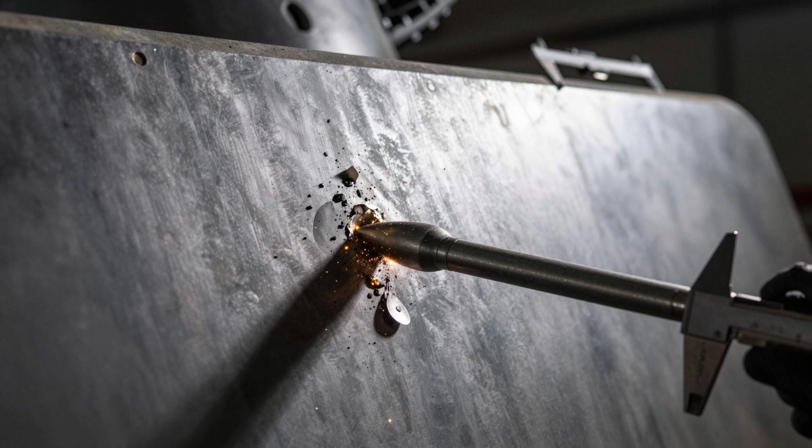Have you ever wondered how something the size of a finger can pierce armor as thick as a human body? Logically, it should just bounce off, but it doesn't, and it's not about size. It's what happens a millisecond before impact.

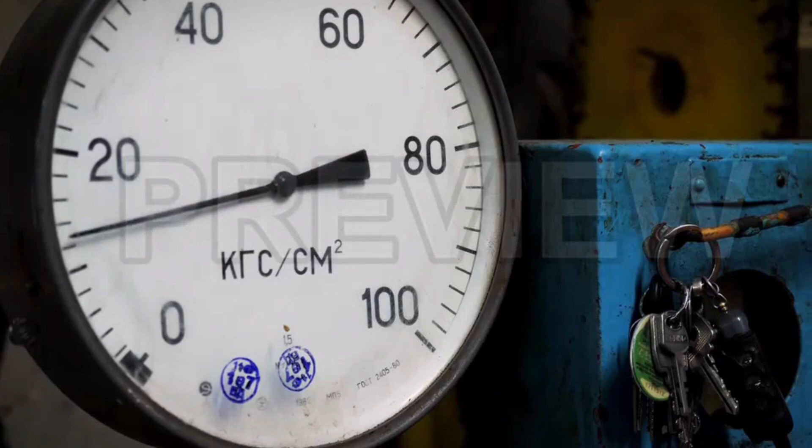The 2A82 tank gun on the T-14 Armata generates pressure inside the barrel of roughly 750 megapascals at the moment of firing. That pressure means nothing on its own, so consider this: atmospheric pressure at sea level is 1 unit. The pressure inside a deep-sea submersible at the bottom of the Mariana Trench exceeds 1,000 atmospheres. Inside a tank gun barrel, at the moment of firing, it's 7,500 of those atmospheres, for a few milliseconds.

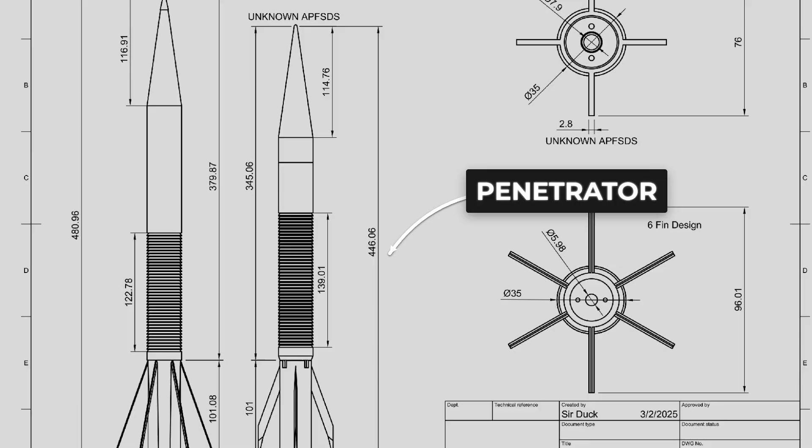Then, zero. The round is already in flight. But there is one more figure that finally breaks intuition completely: the penetrator rod of an APFSDS round. The armor-piercing, fin-stabilized, discarding sabot has a diameter of roughly 22 millimeters and a length of up to 900 millimeters. That is an aspect ratio like spaghetti.

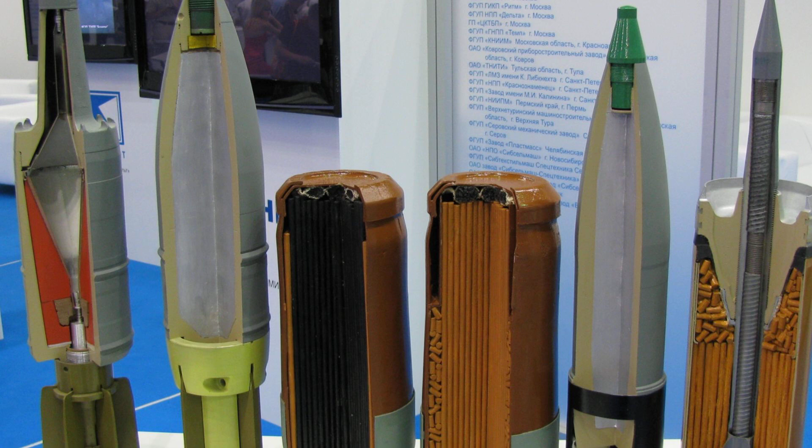That energy and that geometry are the answer, but most people look for it in the wrong place. They think more propellant means more velocity, heavier means more powerful, and that intuition fails from the very first second. Many people assume a round travels faster if it is heavier, with more propellant, greater pressure, greater impulse, and a higher final velocity. But here is the problem.

Newton's second law: acceleration equals force divided by mass. The same propellant pressure acts on the round for the same duration inside the barrel. If the mass is halved, the acceleration doubles. Physics does not ask what you consider logical.

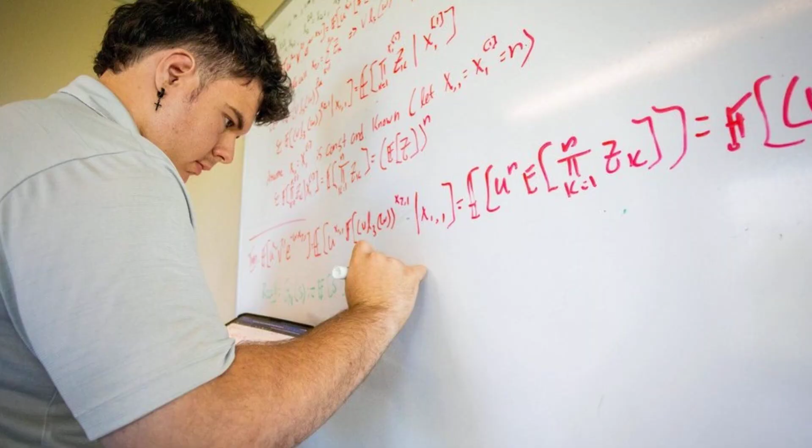Now add kinetic energy. The formula: one half of mass multiplied by the square of velocity. The square. That means if you double the velocity, the energy quadruples, not doubles, quadruples. That is why engineers deliberately accepted a reduction in mass in exchange for a sharp jump in velocity. The mathematics proved more profitable than intuition, but velocity and mass are still not the full picture.

There is a third parameter that decides everything: pressure at the point of contact. Imagine a stiletto heel and the wide sole of a winter boot. The same person's weight, but the pressure on the floor differs by tens of times. That is why the stiletto pierces a parquet floor, and the boot does not.

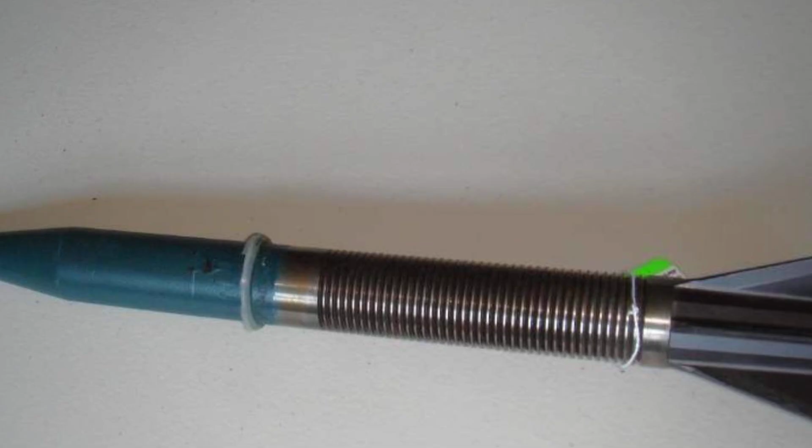The armor-piercing, fin-stabilized, discarding sabot rod is the stiletto. The high-explosive fragmentation shell is the boot. All the kinetic energy is concentrated on a circle 22 millimeters in diameter, not distributed, concentrated. What actually determines everything is specific kinetic energy per unit of cross-sectional area. How much energy is focused on that tiny circle where the round meets the armor?

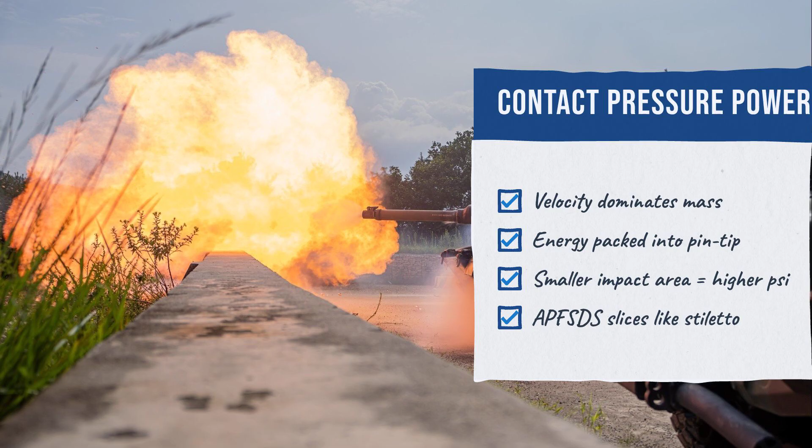Armor penetration is not mass, and not velocity in isolation. It is pressure at the point of contact, concentrated in the smallest possible diameter at the highest possible velocity. The first system is the round itself, more precisely, its shape and the way it is fired.

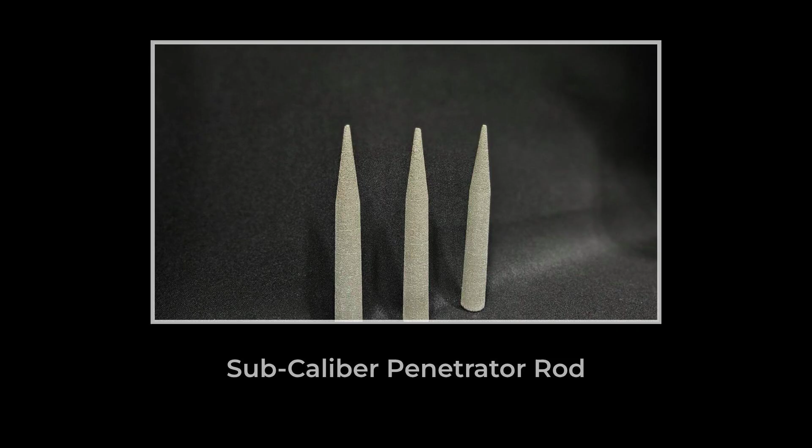A standard high-explosive shell fills the entire diameter of the barrel. It is heavy and wide, and moves slowly, around 900 meters per second, for most 125mm ammunition. The sub-caliber round, an armor-piercing fin-stabilized discarding sabot round, is an arrow-shaped tungsten or uranium rod with a diameter of roughly 22 to 30 millimeters, fired from a gun with a bore of 120 or 125 millimeters. It is 4 times narrower than the barrel.

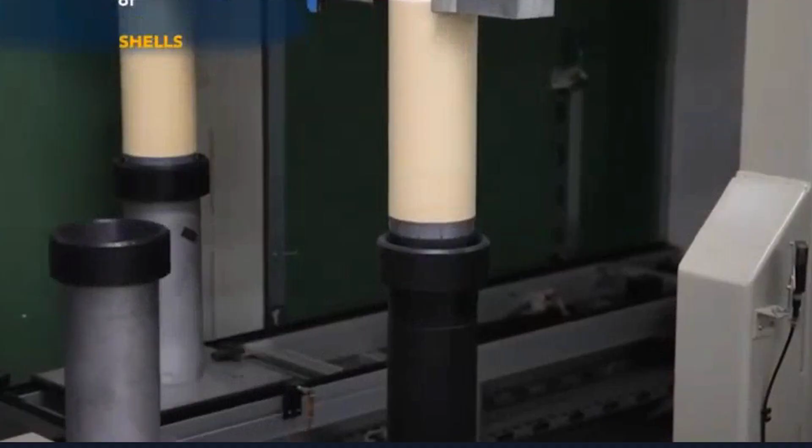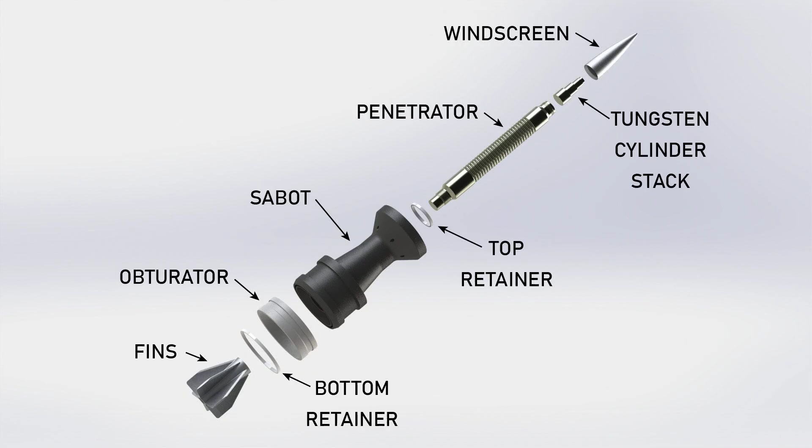How do you fit a narrow rod into a wide barrel and still use all the propellant pressure? The answer is the sabot. The discarding sabot is typically 3 aluminum petals that fill the space between the rod and the barrel. All the force of the propellant pushes the sabot, and the sabot pushes the rod. At the muzzle, aerodynamic drag instantly strips the sabot away to the sides, and only the rod continues in flight.

Imagine throwing a spear that is too thin for your hand to grip. You hold it inside a glove that perfectly fills your grip. You throw it, the glove flies off, and the spear keeps going. Exactly that. The sabot is the glove, needed only for the shot.

The sabot is made of aluminum, because it must be light. It does not travel to the target, it only transfers the impulse from the propellant to the rod. The American M829A3, the Russian 3BM60, the British L27A1, and the German DM63 are all built on the same principle. The rod flies to the target, and the sabot falls away between the tank and the target.

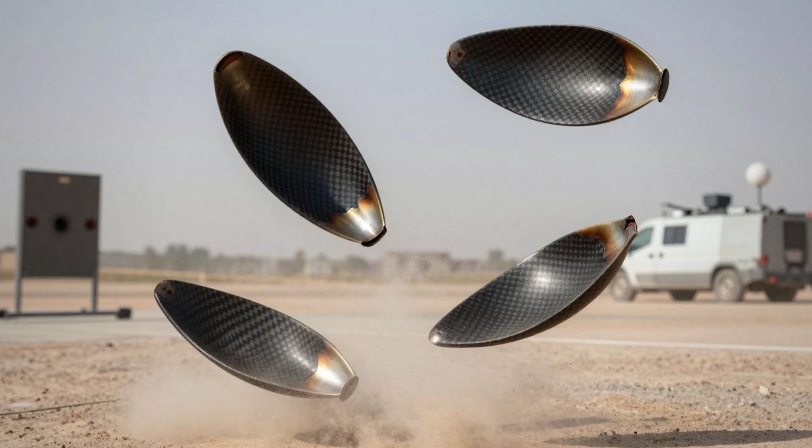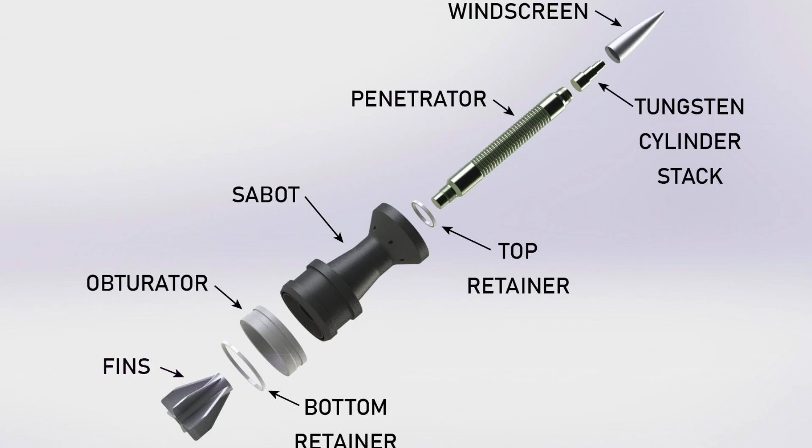Here is a detail almost no one knows. The sabot petals fly off to the sides at several hundred meters per second, and within about 30 meters of the tank, they are lethal to an unprotected person. Not the round, the wrapper around the round. That is why the US Army has specific protocols. Infantry does not stand to the side of a tank when an armor-piercing, fin-stabilized, discarding sabot round is fired.

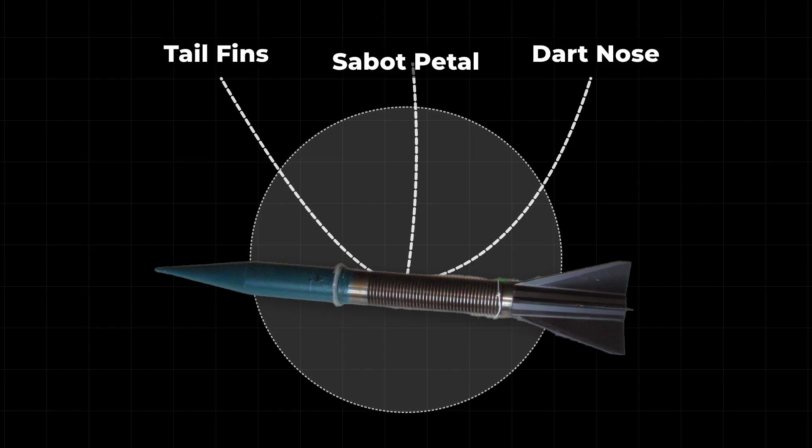This is not theory. These are documented incidents on test ranges. And the stabilizer fins at the tail of the rod, small metal petals, keep it on axis in flight rather than using rifling, because rifling at that velocity would simply destroy the thin rod.

But there is another system that almost no one accounts for, and it breaks everything we just established. What is it made of, and why is that not simply a question of hardness?

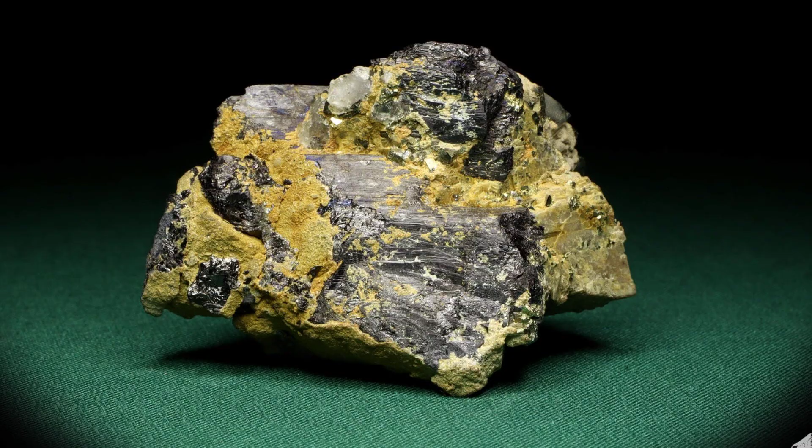The first option is tungsten, the most refractory metal in practical use. Hardness on the Mohs scale of 7.5 out of 10, harder than most structural metals. A tungsten rod packs maximum mass into minimum diameter, and that directly increases specific kinetic energy at the point of impact. Most NATO countries use tungsten alloys in variants without depleted uranium.

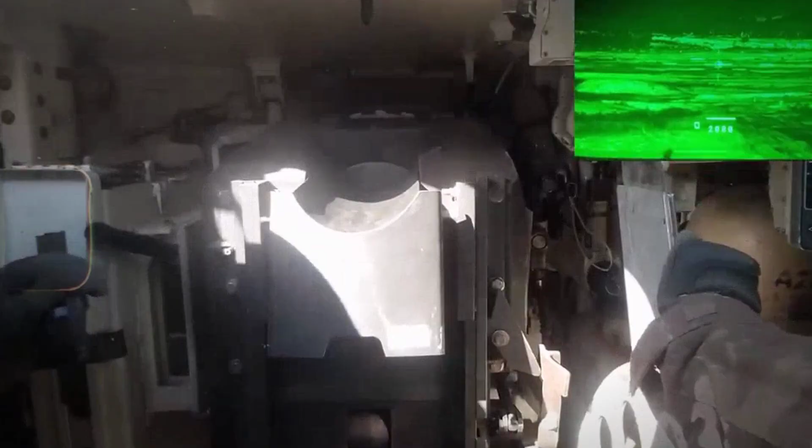Examples include Japan, Israel, and Germany with the DM53, using tungsten. The second option is depleted uranium.

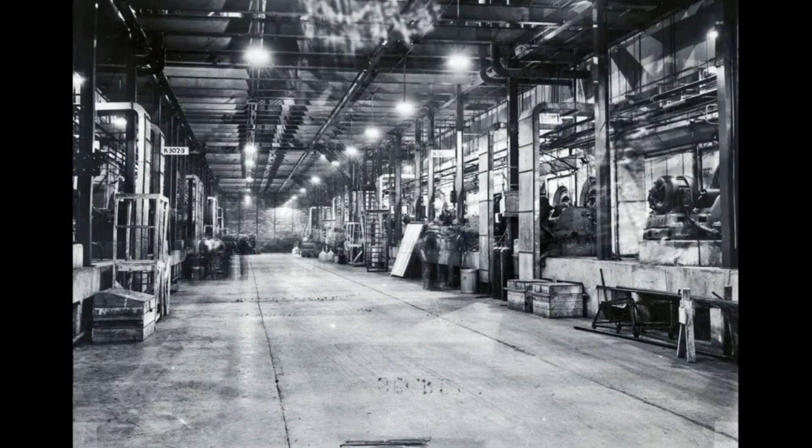The US uses it in the M829, Britain in the L27, and in certain Israeli designs. Depleted uranium is a byproduct of nuclear fuel enrichment, non-nuclear in the weapons sense.

But density is not the main point here. The main point is what happens at the moment of impact, with depleted uranium. This is where an effect appears that changes the entire logic of penetration.

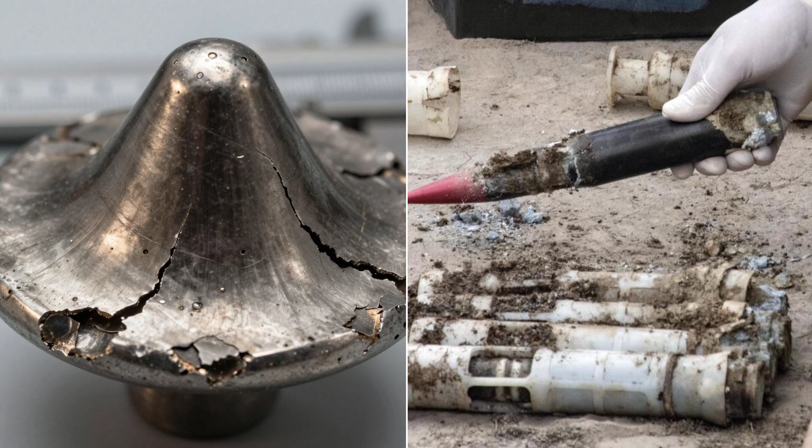Tungsten, under contact with armor, deforms in a mushroom shape. It expands at the tip like a crushed bottle cork. The end of the rod flattens, the effective contact diameter increases, and the pressure drops. This is the physics of plastic deformation.

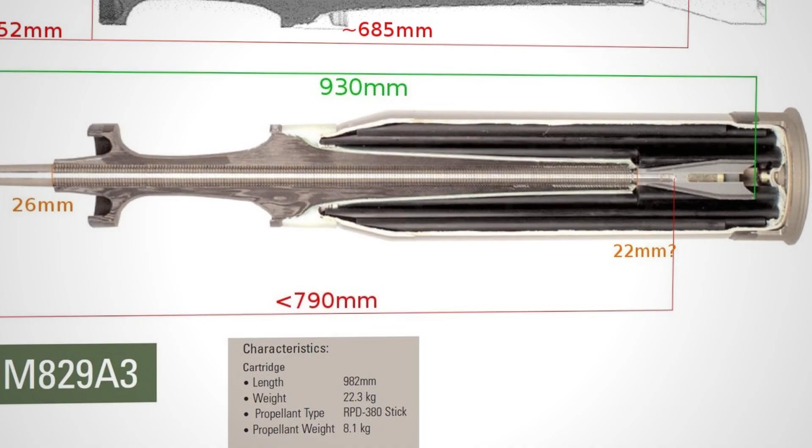The metal does not have time to fracture and simply flows sideways and deforms. Depleted uranium behaves in a fundamentally different way. It shears off in microlayers at the point of contact and remains sharp throughout the penetration process.

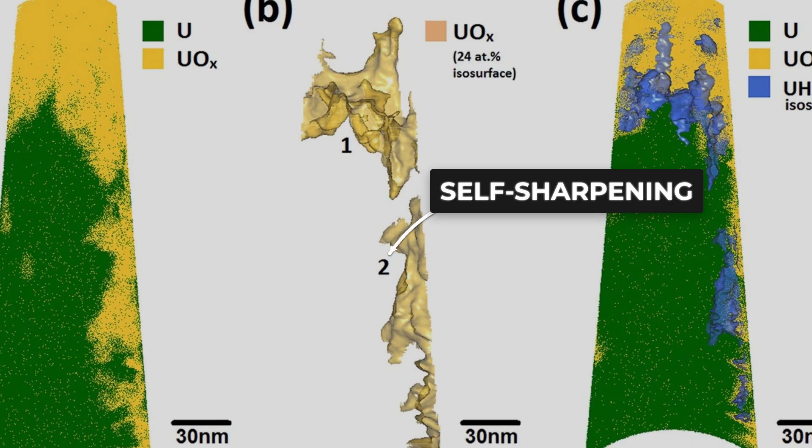Imagine a pencil that sharpens itself as you write. The tip does not flatten. It shears off in thin layers and stays sharp. That is exactly what uranium does under the extreme pressure of impact.

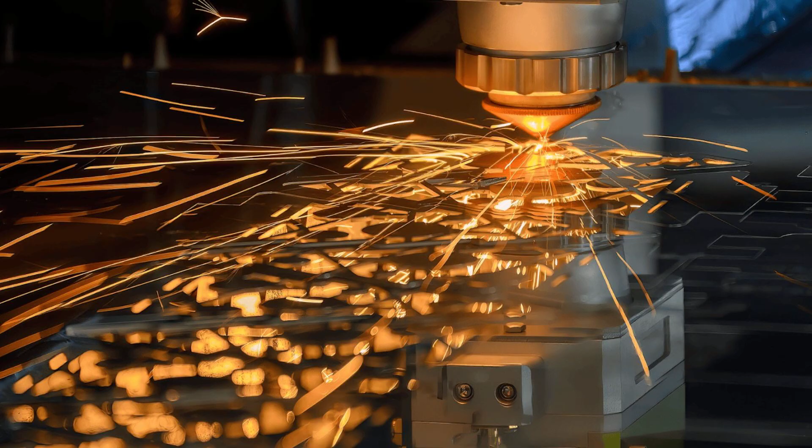Physicists call it adiabatic shear failure, but the essence is simple. The metal has no time to transfer heat to adjacent layers. It locally ignites and flies away. The rod sharpens itself in the process of penetrating, self-sharpening.

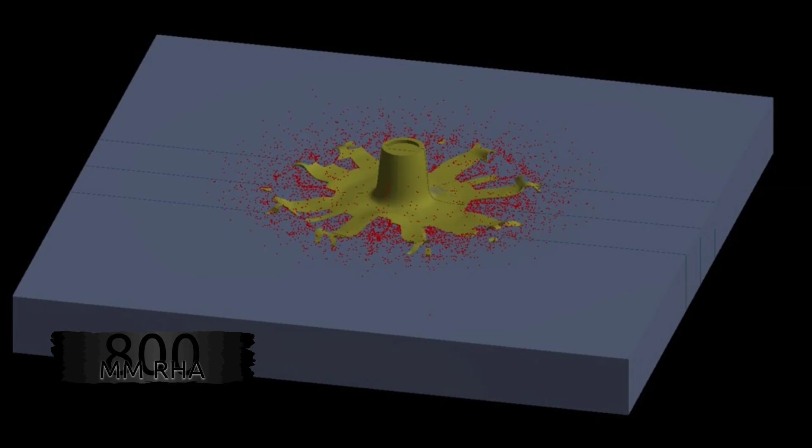That is precisely why the M829A4, the longest APFSDS currently in US Army service, roughly 900 millimeters long with a diameter of 26 millimeters, penetrates the equivalent of over 800 millimeters of rolled homogeneous armor under standard NATO testing, not because of the metal itself, but because of how the metal behaves under extreme pressure.

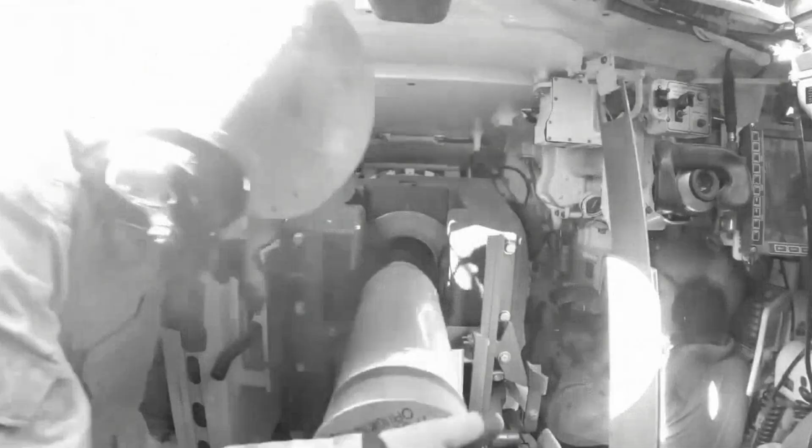But depleted uranium has another side, one not discussed in technical brochures. After Kosovo and Iraq, elevated rates of cancer were documented among veterans and local residents in areas where depleted uranium munitions were used, known as Balkan syndrome. NATO officially denied any link until 2001, until parliamentary investigations in Italy and Belgium forced an acknowledgement of the problem.

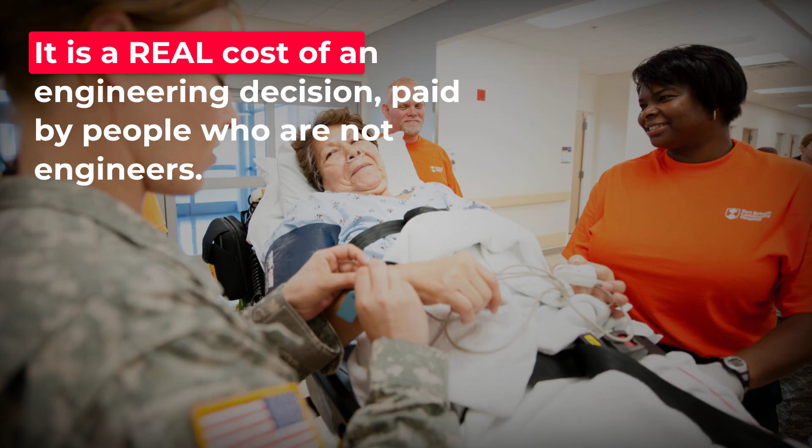Depleted uranium partially vaporizes on impact and settles as radioactive dust. This does not make the weapon less effective, but it is a real cost of an engineering decision, paid by people who are not engineers.

But there is one more level, and it is not in the metal, not in the shape of the rod, it is in what happens on the other side of the armor. Armor is not a passive obstacle. It evolved in response. Modern composite armor is not simple steel plates.

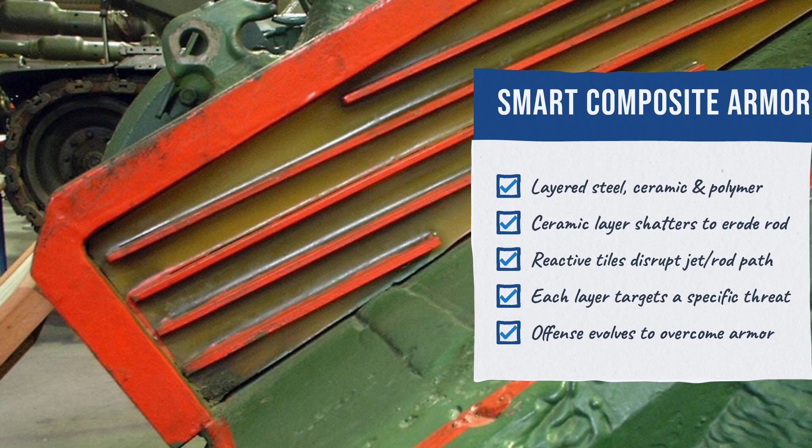It is a package of different materials: high-strength steel, ceramics made from aluminum oxide or boron carbide, polymer layers of ultra-high molecular weight polyethylene, and sometimes voids with calculated geometry. Modern frontal armor works sequentially, and each layer responds to the round in a different way.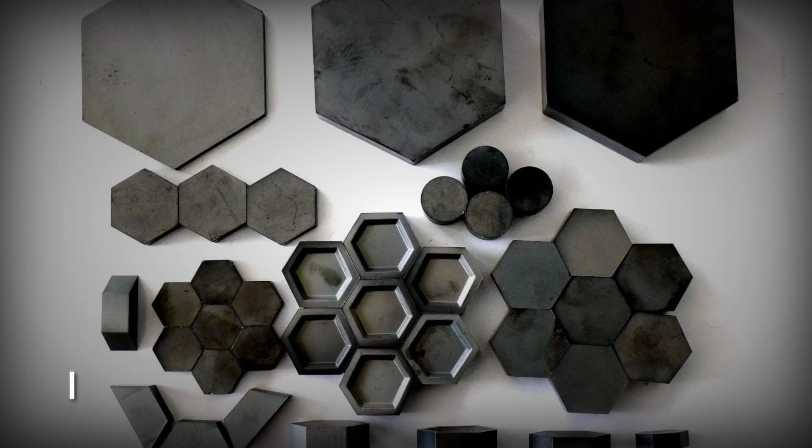Ceramic is the first and most important layer. Boron carbide has a hardness second only to diamond. When the penetrator rod strikes the ceramic, two processes occur at once.

The ceramic disrupts the rod tip or forces it off axis, and at the same time, the ceramic shatters into powder, absorbing kinetic energy as it destroys itself. This is not a weakness of ceramic, it is its job. It is supposed to break, and to break in a way that takes as much energy as possible with it.

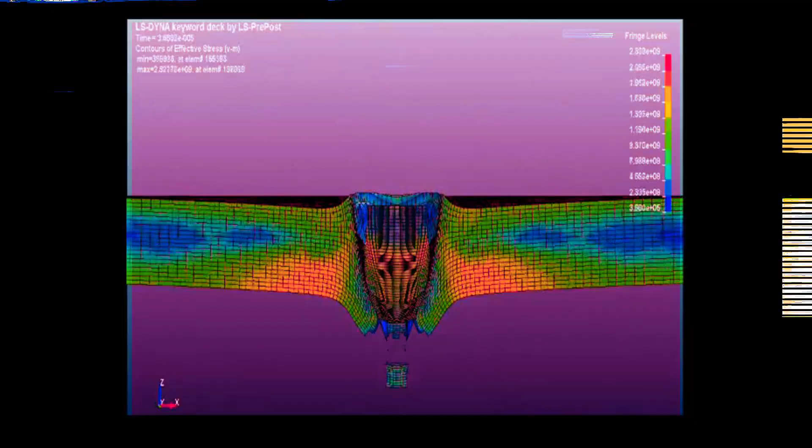The steel layer behind the ceramic receives a rod that is already deformed and slowed. If the ceramic did its job, the rod may fracture into several fragments, each of which no longer carries enough specific energy to keep penetrating. If it did not, the steel takes the residual impact.

There is one more layer of protection, and it is not passive. Reactive armor uses tiles of explosive mounted on the tank's outer surface. These tiles are known as explosive reactive armor, or ERA. They detonate toward the incoming round and try to shatter or destabilize the rod before it reaches the main armor.

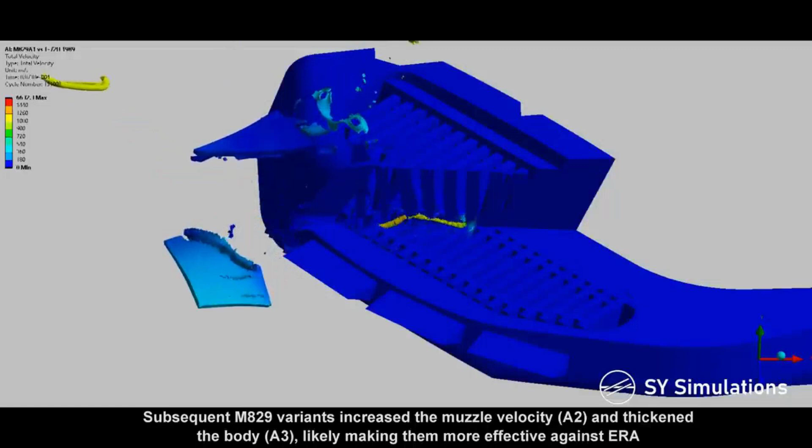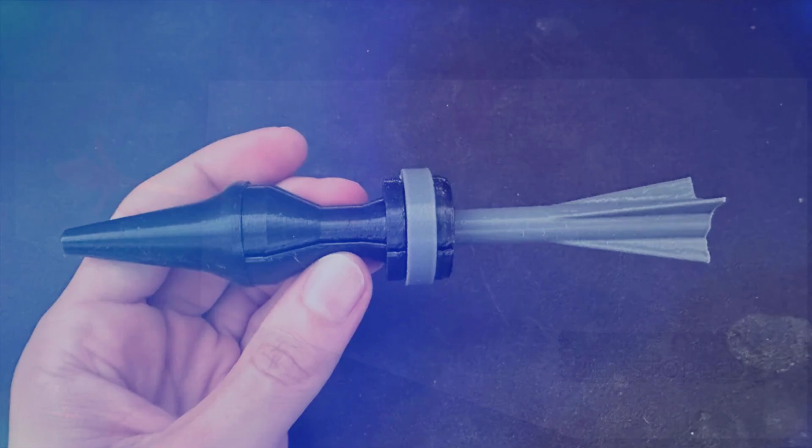Russia's Kontakt-5, Israel's Trophy, and the American TUSK on the M1 Abrams all operate on this principle. Against shaped charge jets, explosive reactive armor is almost fully effective. Against armor-piercing, fin-stabilized, discarding sabot rounds, spelled APFSDS, it is only partially effective. The explosion can deflect the rod off axis, but it cannot remove its kinetic energy.

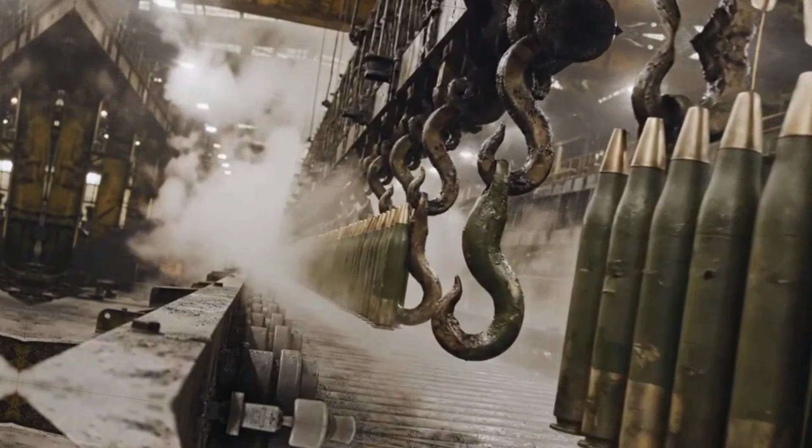This is the arms race at the micro scale. Every solution generates a counter-solution. Every defense generates a new round. But there is one more element not discussed in basic explanations: the angle of engagement.

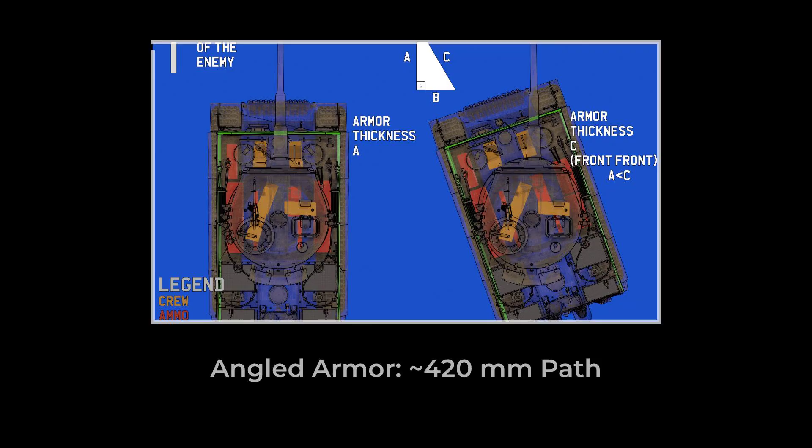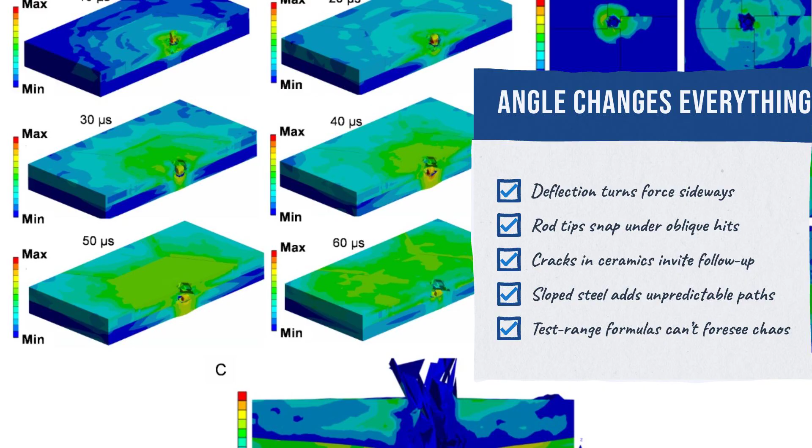Imagine trying to push a needle through several layers of dense fabric at an angle. The first layer deflects the point, the second breaks the tip, the third simply absorbs whatever force remains. Each layer is calculated for the specific residual condition of the round after the layer before it.

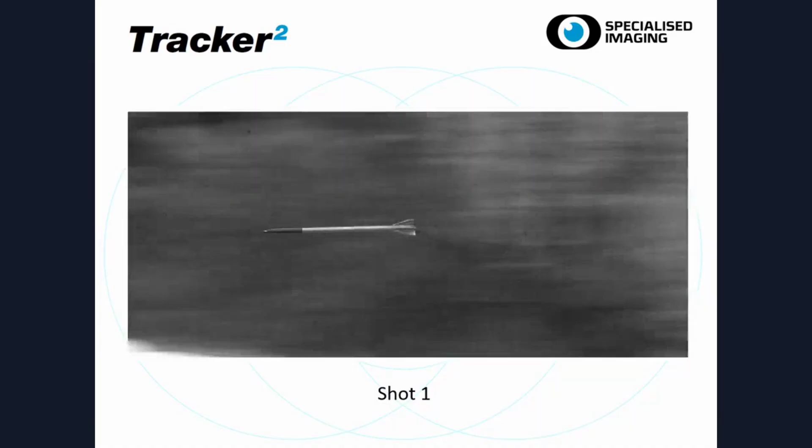And here is the honest part. Engineers can calculate penetration against homogeneous armor using standard methods. There are formulas, there are range tests, there are documented results. But a real engagement is not a range.

It is an angle of impact that can shift at the last moment because of uneven ground. It is armor damaged by a previous hit, where the ceramic has already done its job once and will not recover. If you want to understand how armor answers that impact, the next video is already there.